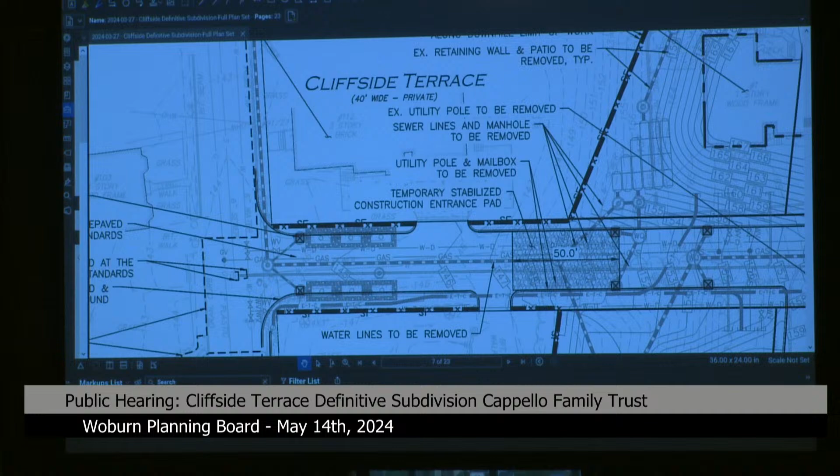Here's just the layout showing 40-foot right-of-way, 26-foot pavement width, with a 4-foot sidewalk and a 5-foot landscape strip for the full length of it. We are going to rebuild the entire Cliffside extension in this new one. So we brought it down from our property lines here all the way down to the right-of-way.

The radiuses, you'll see, we required a waiver for this. Again, it's kind of due to the 40-foot existing right-of-way. We put in the maximum radiuses we could without encroaching onto the abutter's property. We had spoken with engineering about putting in a 24-foot width right-of-way in which we could probably get the adequate radiuses, but he didn't make a determination one way or the other, but it sounded like everyone was more comfortable with the wider right-of-way with some smaller radiuses.

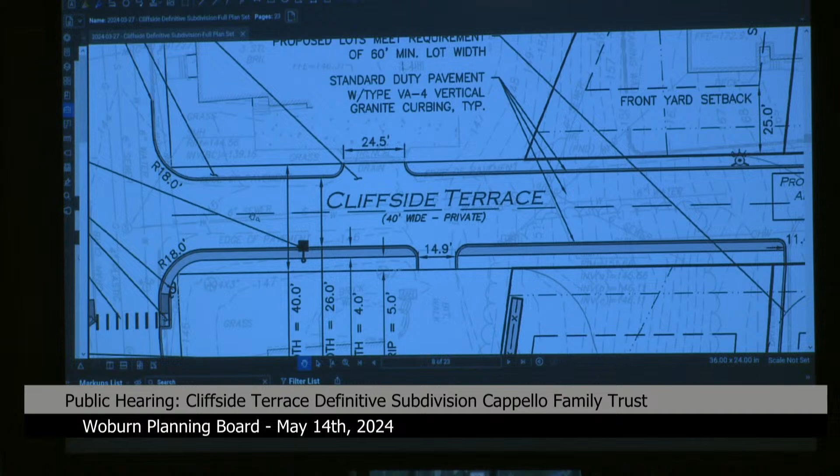We did do a fire truck turning analysis, which is later on the plan set, and can show that the fire truck can easily navigate this without stopping, in one forward motion coming in and out, and those radiuses aren't a hindrance to the fire truck.

We did provide a stormwater analysis to show that we're reducing the rates of water coming off as well as the volumes of water coming off, so that we should mitigate all of our disturbances on site. And when we came in for the planning, it was noted that we should assume all these lots are developed. So this stormwater analysis is assuming that all these lots are developed with about 35% impervious and not just a natural wooded land. So we did pre-plan the drainage for the developed parcels.

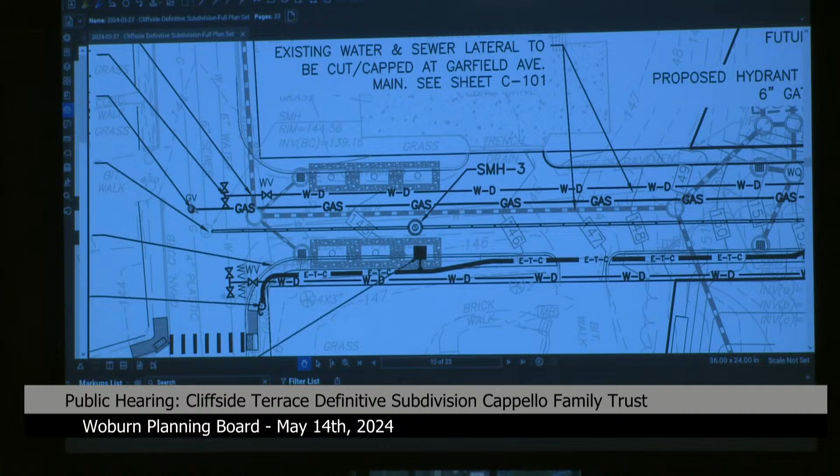This is your utility plan showing that we looped the water up and down the road. We've provided the water gates per standard water department requirements in the city of Woburn. They did ask in engineering that we move this gas main into the sidewalk and keep it out of the roadway. That's a revision we're happy to make or condition.

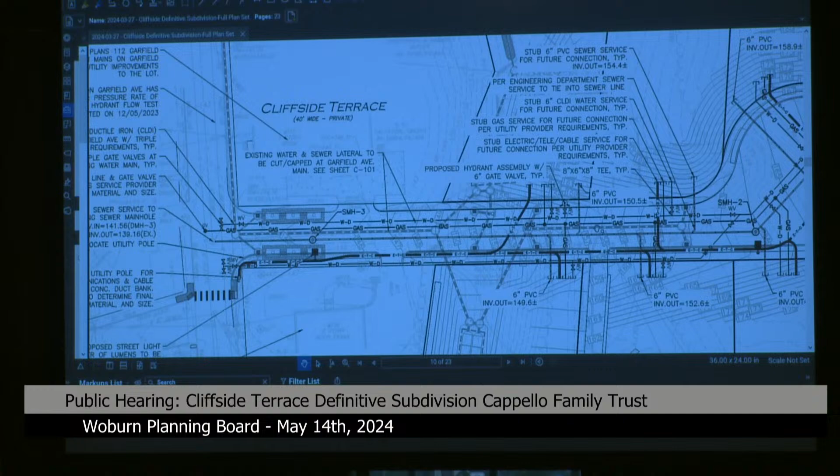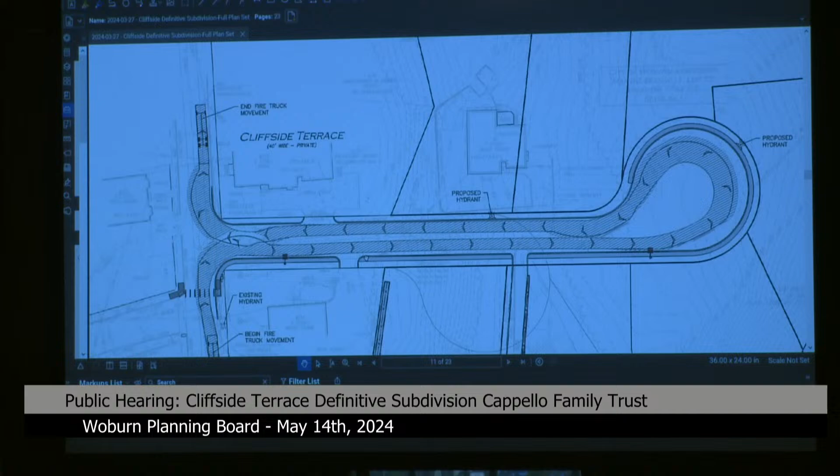We do show the sewer and electric coming up here. There's a hydrant up at the top of the site and halfway down the site, as was recommended in the preliminary comments that we had provided. There's an analysis showing the fire truck coming up and around the site without clipping the sidewalk anywhere.

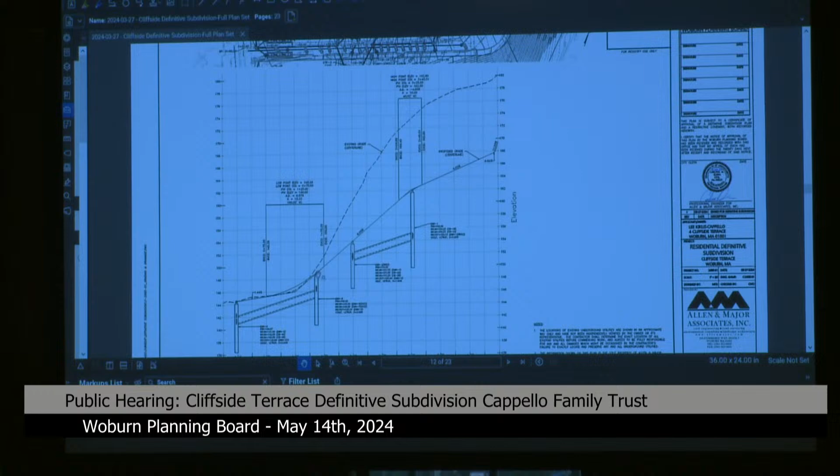Here's a profile. These are the existing grades here you can see in the dashed line that go way up here. And in our preliminary, we had provided a design that showed a 10% slope up here, which is the maximum allowed per the state fire code. We got some feedback from DPW that preferred 8%, which is allowable per the subdivision regulations. So we did lower this steep slope here from 10% to 8% to meet the local subdivision regulations.

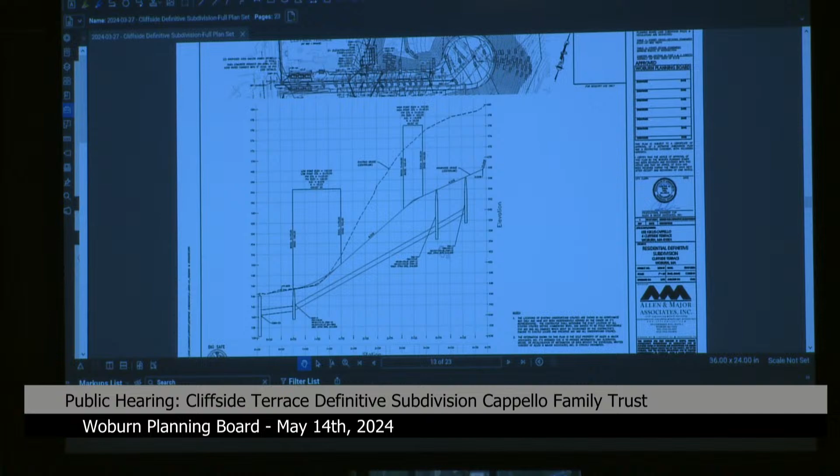This is just one showing the sewer. The other one showed some other utilities because it was kind of messy, so we separated the drainage and the sewer profiles for the road. These are just some standard construction details. We'll flip through to the landscaping.

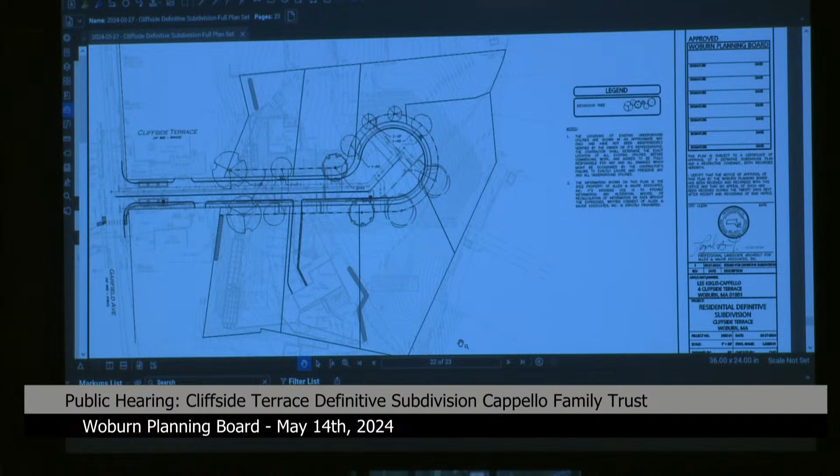Any questions? Jim? Question is, how much ledge is being pulled off this site? I don't have a volume of ledge, but at the biggest cut, it's about 12 feet of cut, of which I don't know how much is ledge, but I'd assume there'd be some substantial amount of ledge within that 12-foot cut.

The updates from this drawing to the prior set have encompassed most of the concerns in my mind, and I'm thankful for that. I do have reservations about the amount of ledge coming out of there and how it's gonna be managed, and I think Mr. Duran addressed that in his letter. I think that's gonna need a lot of attention, and I see a lot of folks here in the gallery today, and they probably have the same concerns.

I would be looking for you folks to come up with a plan, a schedule of activities, such that when you're gonna commence construction, when activities take place, and how long the actual construction is gonna last, which I envision to be longer than the 2-year period. In my opinion, it's a whole lot easier to sit in front of other city residents and give them an accurate timeline other than the 2-year standard approval we give, with developments that are a little more sensitive and aggressive in the area neighborhoods. But that's really just what I had to say. Oh, it's a good suggestion. Thank you, Jim.